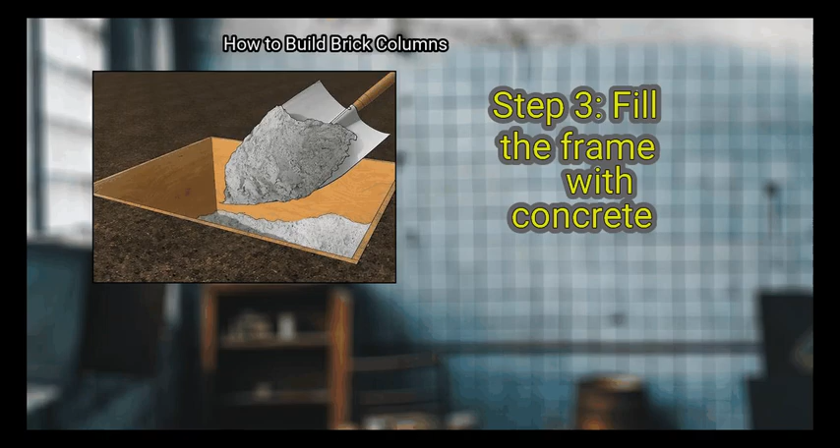Step 3. Fill the frame with concrete. Once you've poured the concrete, take a piece of wood and drag it across the surface of the frame to scrape off any excess concrete, and smooth out the surface so it's level for your column. Then, wait for the concrete to dry.

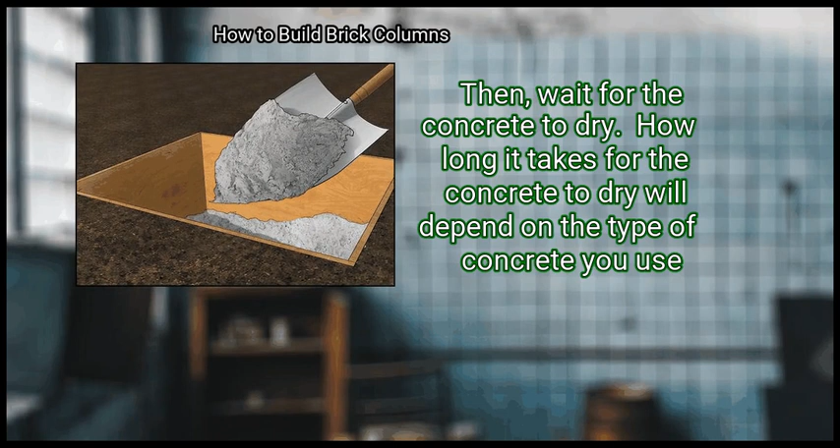How long it takes for the concrete to dry will depend on the type of concrete you use. Some concrete can take weeks to fully cure, while others are designed to dry in a few hours. If you want to speed up your project, try using a fast-setting concrete mix so you can pour the concrete and start working on your column all on the same day.

Alternatively, if the column isn't load-bearing or very tall, you can lay bricks and mortar in an area 18 inches, 46 centimeters, deep and 4 inches, 10 centimeters, wider than the column. The size of your foundation depends on how high you want to make your column.

For example, if you're making a 2 feet, 0.61 meters, column, pour an 8 inch, 20 centimeters, concrete foundation and put in rebar facing upwards in the concrete. On top of the rebar, place cinder blocks before laying the brick on top of it.

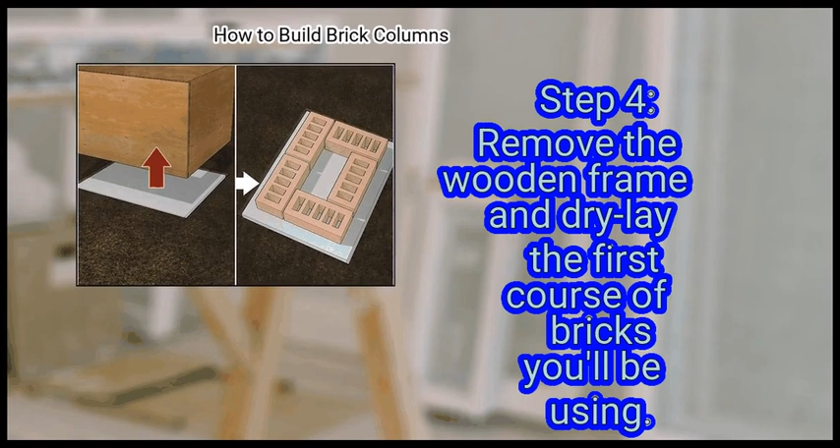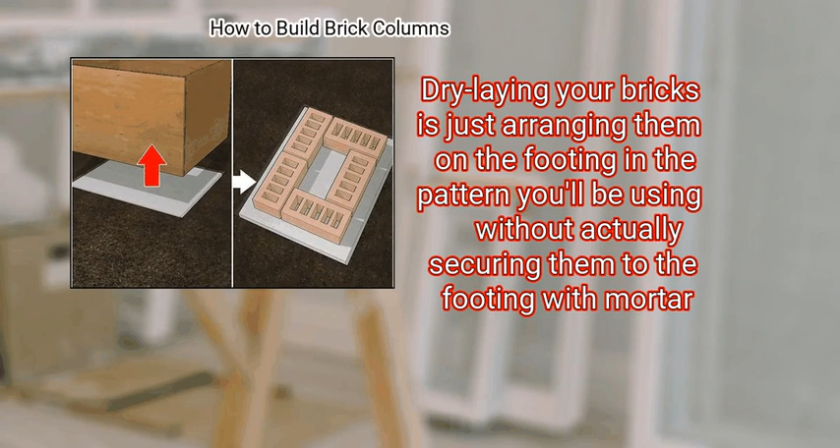Step 4. Remove the wooden frame and dry lay the first course of bricks you'll be using. Dry laying your bricks is just arranging them on the footing in the pattern you'll be using without actually securing them to the footing with mortar. Simply take all the bricks you'll use for the first course, the first layer of your column, and lay them on top of the footing so the ends are touching and they form a square or rectangle.

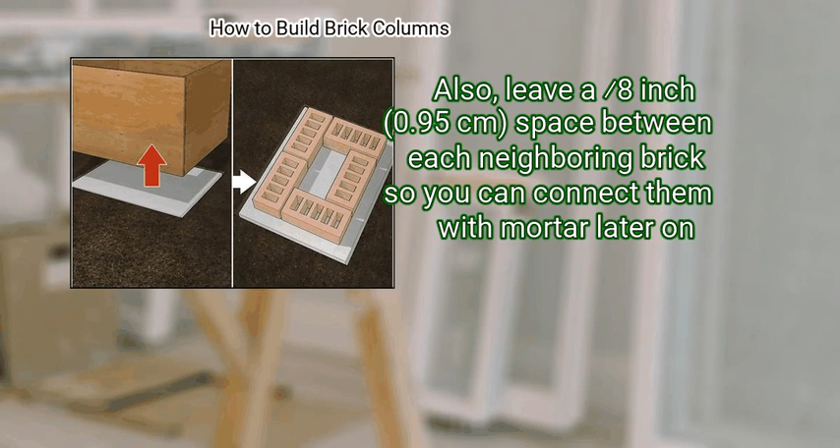Don't put a brick in the center of the course since the center of your brick column will be hollow. Also, leave a 3/8-inch, 0.95 centimeters, space between each neighboring brick so you can connect them with mortar later on. When the bricks are centered on the footing, there should be 4 inches, 10 centimeters, of footing extending off of each side. Finally, trace the outer and inner edges of the course, then remove the bricks.

Use a pencil to trace all around the outer edge of the course and then along the inner edge of the course so you're left with 2 rectangles or squares, one inside of the other. This will give you an outline to use when you spread the first layer of mortar on the footing. When you reach a gap between the bricks, just draw a straight line across the gap to the next brick as if the gap wasn't there.

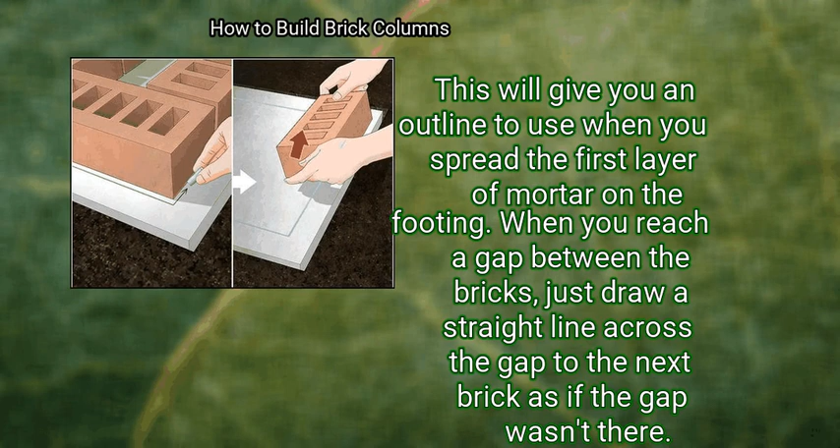Method 2. Laying the bricks. First, spread a 3/8-inch, 0.95 centimeters layer of mortar inside the lines on the footing. Use a trowel to apply the mortar to the footing, and try to stay inside the reference lines as much as possible. However, it's okay if you go outside of the lines a little bit. You can always scrape the mortar off later before it dries.

Don't apply any mortar to the center of the footing, which is inside of the outline you drew. You only want to apply mortar where you'll be laying bricks. The center of the footing is where the inside of your column will be, which will be hollow. Wear long pants and sleeves when working with mortar since it can irritate your skin.

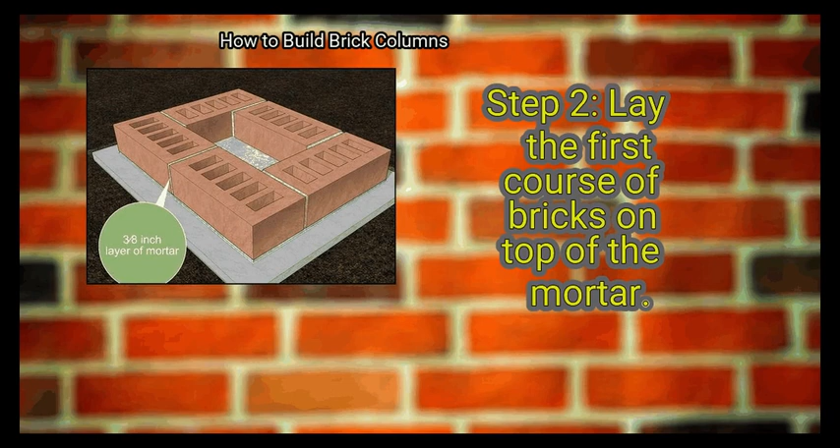Step 2. Lay the first course of bricks on top of the mortar. Take the same bricks you used to dry lay and mark the footing and set them on the mortar in the same pattern you did before. Before you lay each brick, spread a 3/8-inch, 0.95 centimeters layer of mortar on the end that will be joined with the next brick in the pattern.

When you're finished, all of the bricks should be connected with mortar and evenly spaced apart. You want to make sure that you're applying an even layer of mortar to each brick so that your column has a uniform, balanced appearance when it's finished.

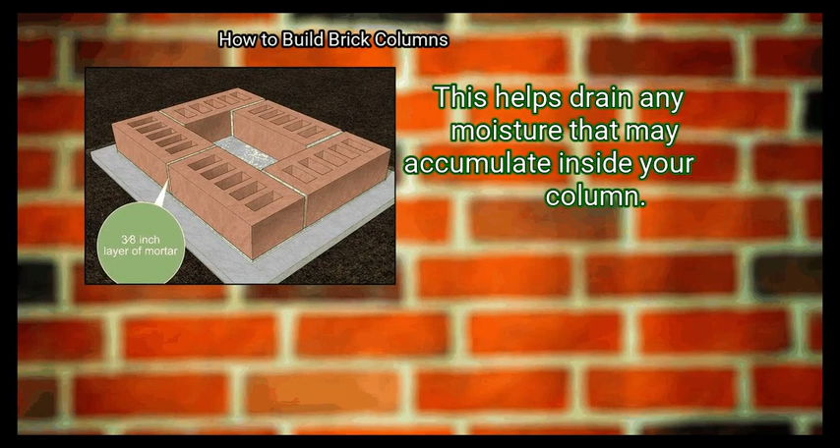Make a weep hole in the base layer of bricks by coating the pencil with vegetable oil and inserting it into one of the bottom mortar joints. Pull the pencil out once the mortar is dry. This helps drain any moisture that may accumulate inside your column.

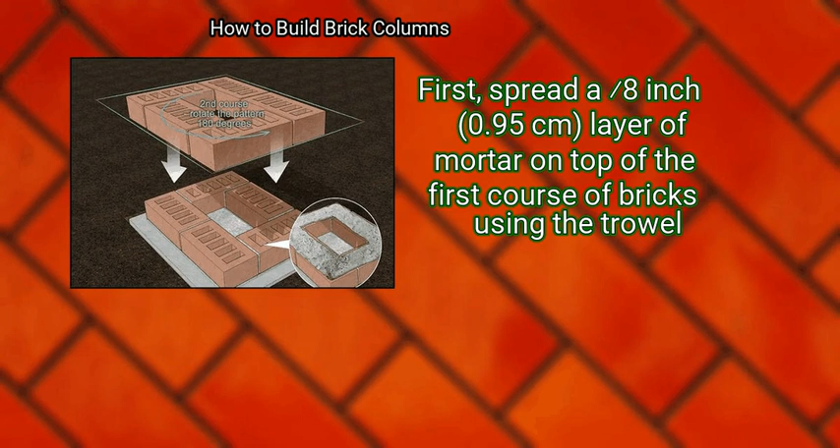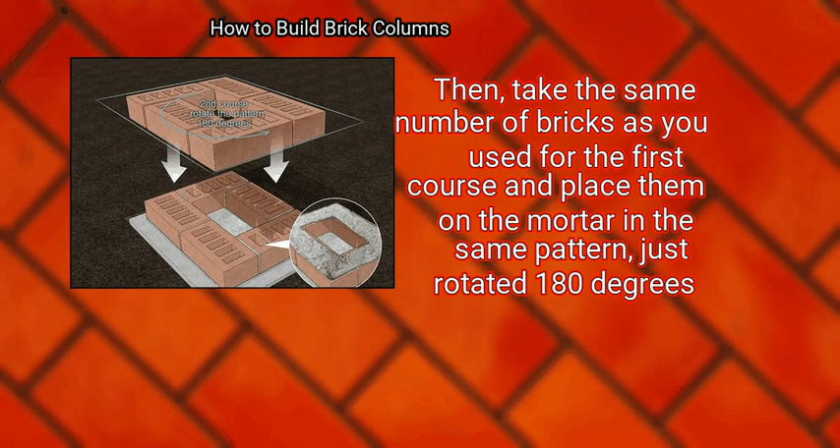Step 3. Repeat with the second course of bricks, but rotate the pattern 180 degrees. First, spread a 3/8-inch, 0.95 centimeters layer of mortar on top of the first course of bricks using the trowel. Then, take the same number of bricks as you used for the first course and place them on the mortar in the same pattern, just rotated 180 degrees. This will give your brick column the alternating pattern that is typically used in brick structures.

For example, if you're staring down at your first course of bricks and there are 2 horizontal bricks on top, 1 vertical brick on each side, and 1 horizontal brick on the bottom, you would lay the second course of bricks so there are 2 horizontal bricks on the bottom, 1 vertical brick on each side, and 1 horizontal brick on top.

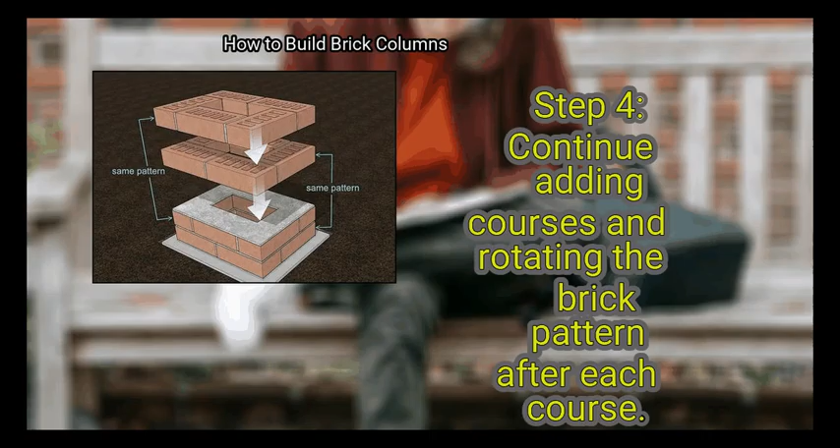Step 4. Continue adding courses and rotating the brick pattern after each course. The number of courses you add depends on how tall you want your brick column to be. Just remember to always rotate the pattern 180 degrees after each course of bricks you lay. Make sure you maintain a consistent thickness with the mortar you apply between courses and bricks.

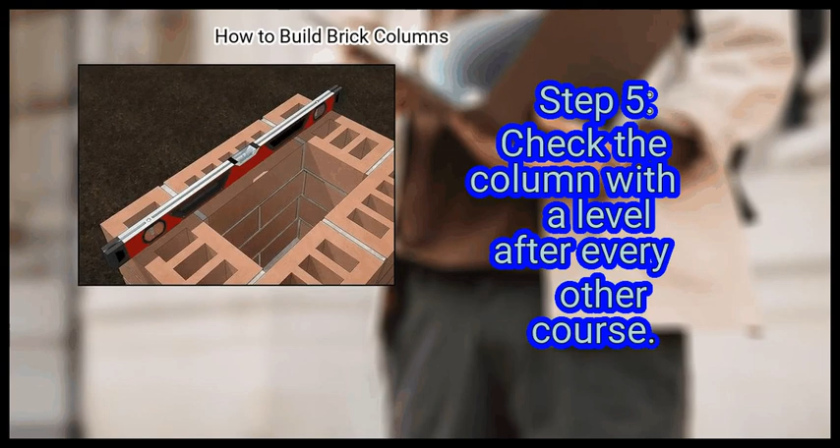Step 5. Check the column with a level after every other course. If the bricks aren't level, you want to catch it early on so you don't compound the issue and realize your column is off once the mortar is already dry.

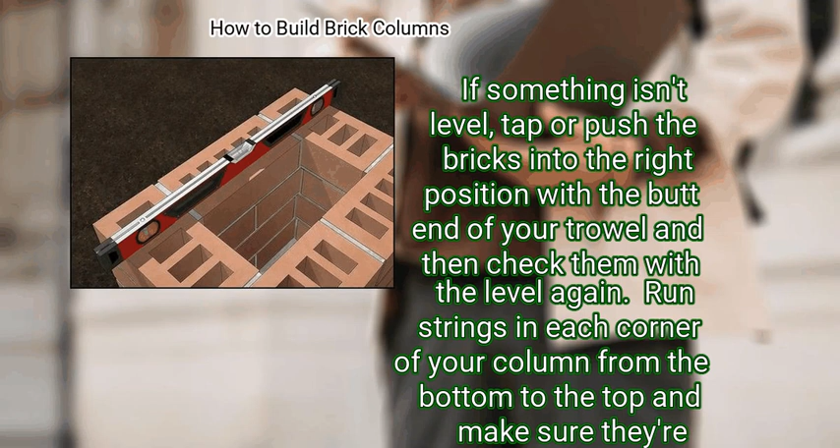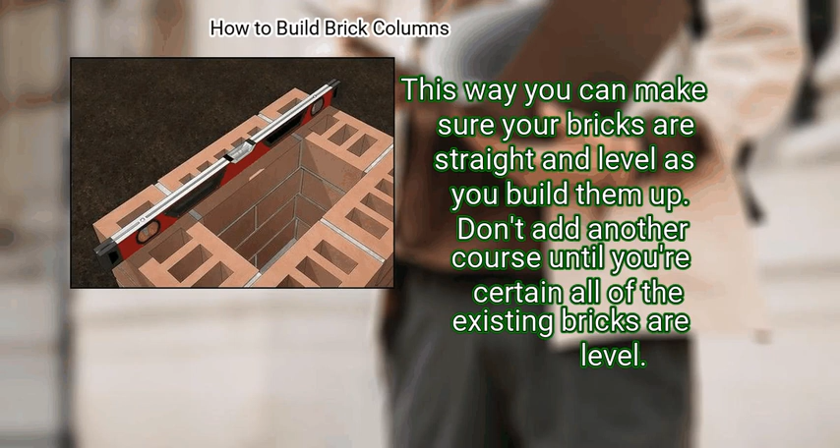To check if the column is level, hold a level against each side, including the top. If something isn't level, tap or push the bricks into the right position with the butt end of your trowel and then check them with the level again. Run strings in each corner of your column from the bottom to the top and make sure they're straight. This way you can make sure your bricks are straight and level as you build them up. Don't add another course until you're certain all of the existing bricks are level.

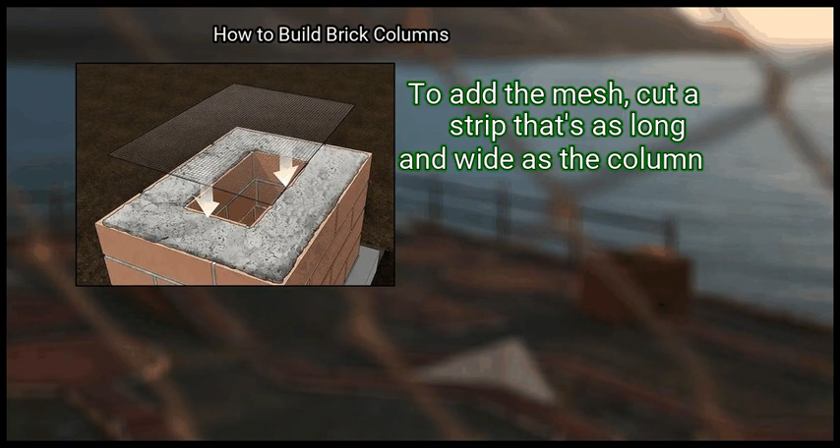Step 6. Add a strip of 1/4-inch, 0.64 centimeters thick wire mesh after every 4th course. Wire mesh will add extra support that can help your brick column withstand heavier loads. To add the mesh, cut a strip that's as long and wide as the column. Then, apply a thin layer of mortar over the top course of bricks and lay the mesh over it. Finally, apply another thin layer of mortar over the top of the mesh before adding the next course. You can find wire mesh online or at your local hardware store.

Finally, smooth out any hardened mortar joints after every 5th course. When you finish laying every 5th course, test all of the mortar joints on the column by pressing your finger into them. If any of the joints resist minimal pressure, they're hard enough to be smoothed out. Just take a jointing tool and go over those joints with it to scrape off the excess mortar. When you're finished, the joints should appear flush with the bricks.

Make sure you do this after every 5th course. Otherwise, some of the joints could harden too much, and you might not be able to smooth them out. Use a masonry brush to clean your bricks as you build up so they look neater.

Method 3. Adding the final course. First, add a layer of mortar and wire mesh before the final course of bricks. Apply the mesh as you did throughout the rest of the column. Just spread a thin layer of mortar over the top course, put down the mesh, and top it with another thin layer of mortar. Don't skip this step. You'll need the wire mesh to help support the final course of bricks, which will have an extra brick in it.

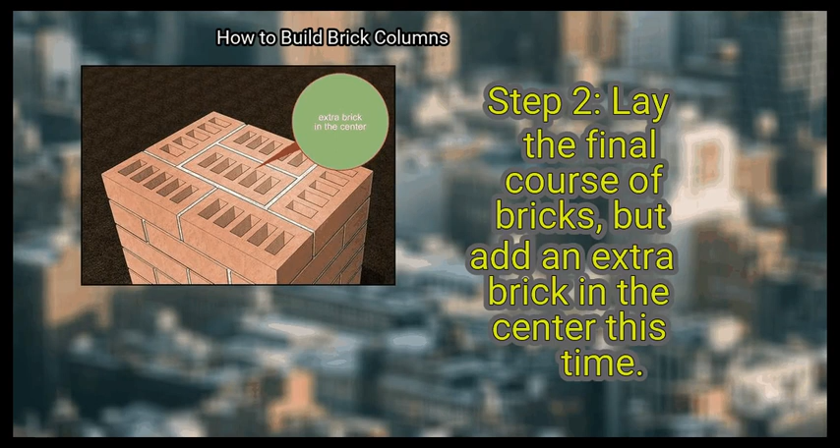Step 2. Lay the final course of bricks, but add an extra brick in the center this time. Since this will be the top of your brick column, you want to cover the hole in the center so it's not visible. To add the center brick, wait until you've put down the first 2 bricks in the final course. Then, lay the center brick and finish the rest of the course.

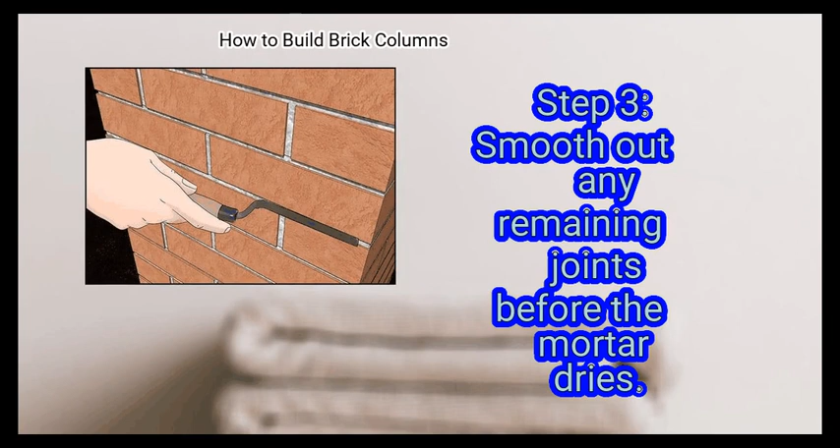Step 3. Smooth out any remaining joints before the mortar dries. If there are any joints you haven't smoothed out yet, wait until they harden to the point where they resist minimal pressure. Then, use your jointing tool to scrape off the excess mortar so they're flush with the bricks. Be careful you don't wait too long or the mortar could dry and you'll lose your chance to smooth out the joints.

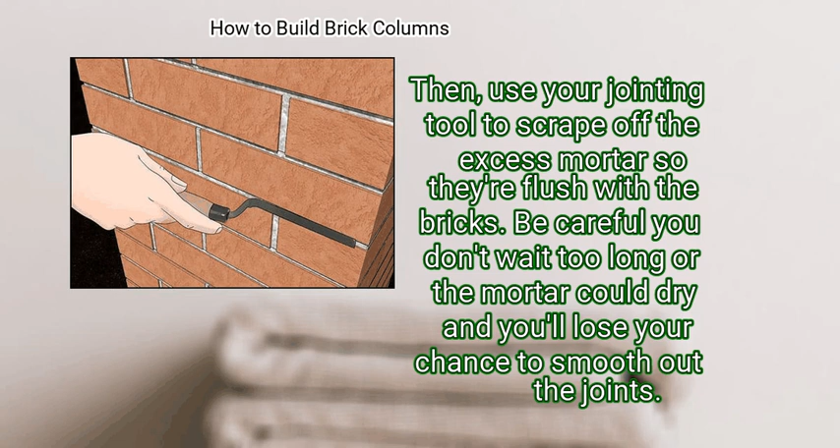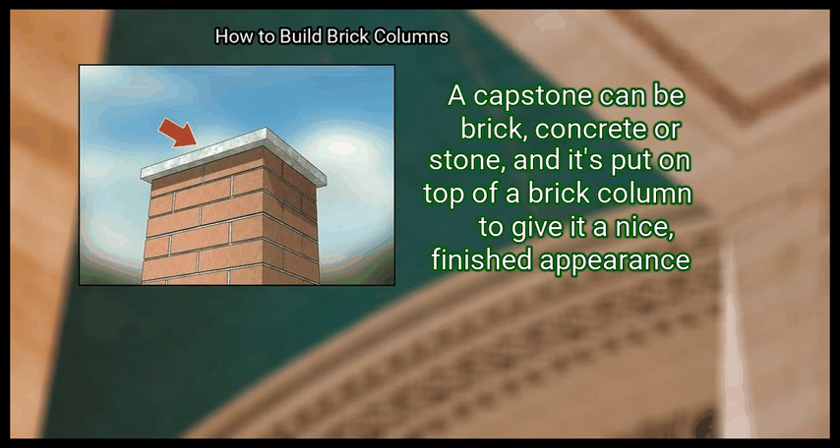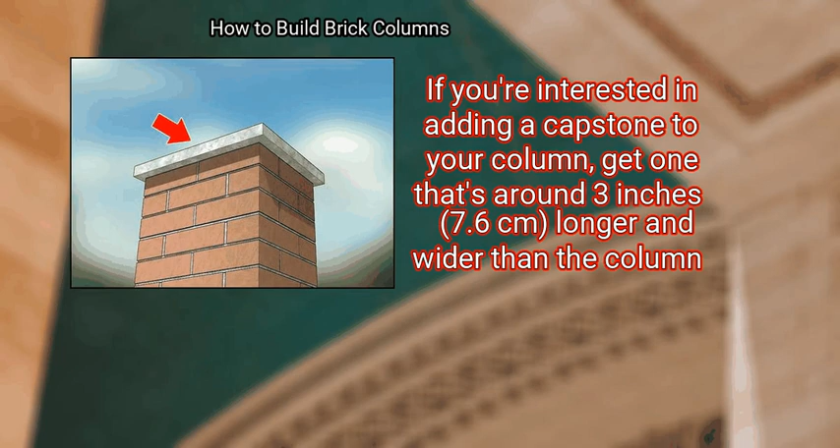Finally, top your brick column with a capstone if you want a polished finish. A capstone can be brick, concrete or stone, and it's put on top of a brick column to give it a nice, finished appearance. If you're interested in adding a capstone to your column, get one that's around 3 inches, 7.6 centimeters, longer and wider than the column. Then, spread a layer of mortar on top of the column and center the capstone on top of it.

You can also make a brick capstone by using bricks that are larger than the ones you used in your column. Cut your bricks in half and lay them with their sides facing out for added strength and visual appeal.